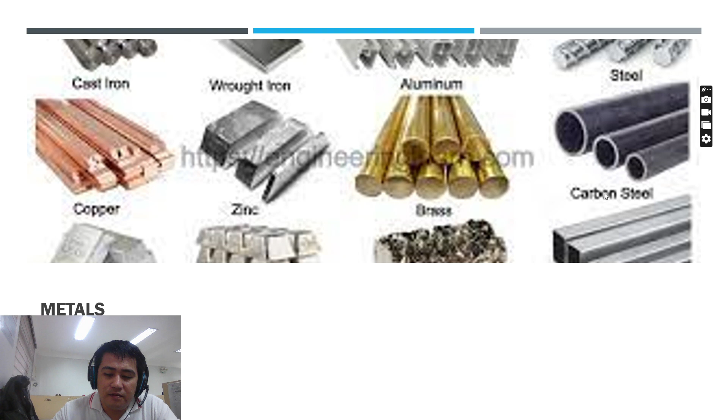Okay, so when we say metal, those are any of a class of substances characterized by high electrical and thermal conductivity. Since our topic is sheet metal, the main word is metal, so when we say metal, it is characterized by high electrical and thermal conductivity.

That means metals are good conductors of electricity due to characteristics like malleability, ductility, and high reflectivity of light. May nag-chat? Ano yung chat?

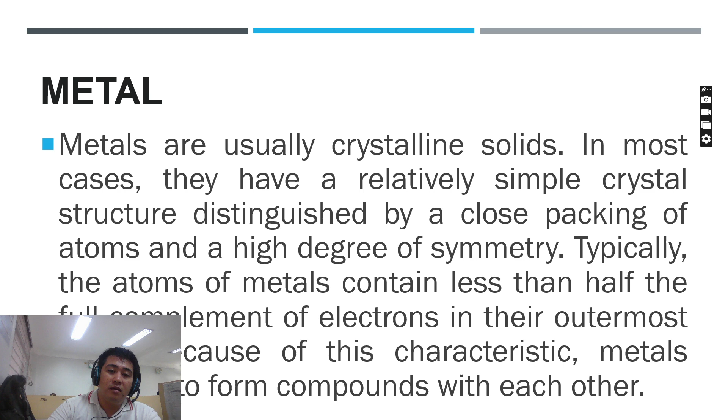Typically, the atoms of metals contain less than half the full complement of electrons in their outermost shell. Because of these characteristics, metals tend not to form compounds with each other.

Another characteristic of metal: they do, however, combine more readily with non-metals, which are oxygen and sulfur. That's why it rusts.

Non-metals generally have more than half the maximum number of valence electrons. Metals differ widely in their chemical reactivity. The most reactive include lithium, potassium, radium, whereas those of low reactivity are gold, silver, palladium, and platinum.

So some metals are reactive, while others are non-reactive. When we say reactive, whatever element gets mixed with it, it undergoes physical and chemical changes. Unlike low reactivity metals like gold, silver, palladium, they don't easily react with other elements, or if there's no reaction like gold, it doesn't rust.

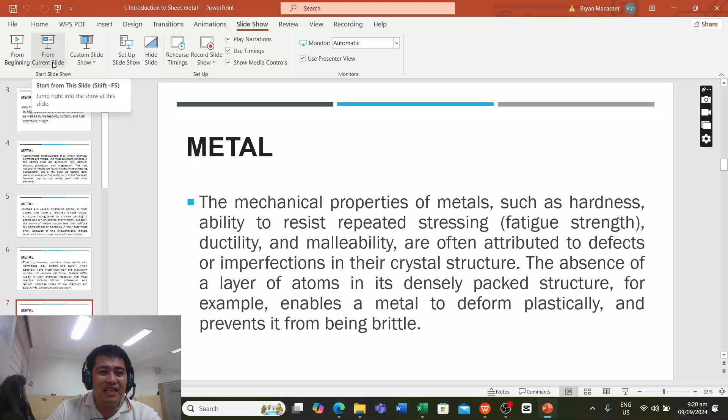Okay, the mechanical properties of metals such as hardness. When we say hardness, this is the stiffness, tension, the strength of materials. It is the ability to resist repeated stressing, which is called fatigue strength.

And then we also have what's called ductility and malleability, which are often attributed to defects and imperfections in their crystal structure. So when we say ductility, wait. What do we mean when we say ductility? Anyone?

Sir, parang dinadaloy yung kuryente.

Ductility refers to the ability of a material to sustain significant plastic deformation before fracture. Plastic deformation is the permanent distortion of material under applied stress, as opposed to elastic deformation, which is reversible upon removing stress. So ductility is a critical mechanical performance indicator, particularly in applications that require materials to bend, stretch, or deform without breaking. Meaning ang bakal ay may kakayahang madaling ma-bend, madaling ma-stretch, or ma-deform na hindi sisira. Yun ang ductility.

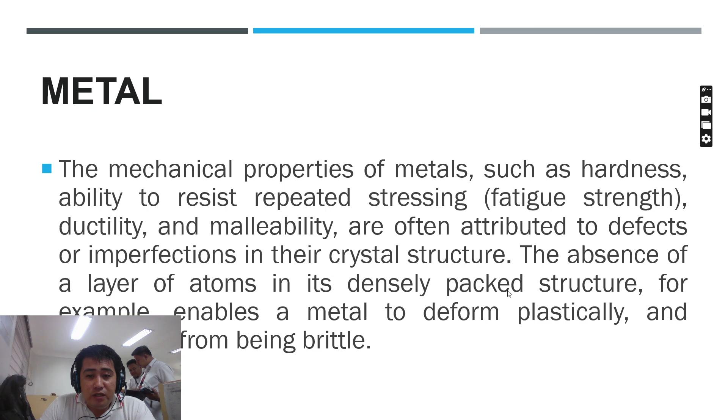May question ba with between ductility and malleability? Wala po. So that's why ductility and malleability often come in pair. Ductility is the ability of materials to be shaped without changing its attributes, without breaking. The absence of a layer of atoms in its densely packed structure, for example, enables a metal to deform plastically and prevents it from being brittle.

Okay, so that is about metal. Yes, sir. Next naman tinatawag nating sheet. Kasi kanina metal, ngayon sheet. Pag sinabing sheet, parang sa Tagalog piraso, tama ba? A sheet is a large, wide amount of something flat, like a sheet of metal or a sheet of paper. So when it goes on your bed, a sheet is a similar expanse of fabric.

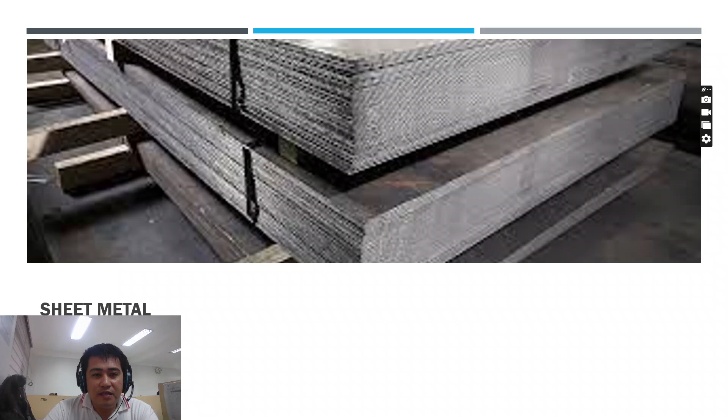As you can see in the picture, that is an example of sheet metal. So when we say sheet metal, it is metal formed into thin or flat pieces. So ito yung mga maninipis, kumbaga sa Tagalog, yung mga yero, lata, ganyan. Usually by industrial process, sheet metal is one of the fundamental forms used in metal working.

So the characteristics of sheet metal, syempre alam naman natin na manipis, at the same time lightweight. So kung manipis at magaan, syempre they are good in terms of production and industrial applications. Marami tayong industrial applications for sheet metal. Sino makakapagbigay ng halimbawa? Anyone? Kasi hindi ko kayo nakikita. Sheet metal is very good material in terms of industrial applications. Can you give examples kung saan ginagamit ang mga sheet metal?

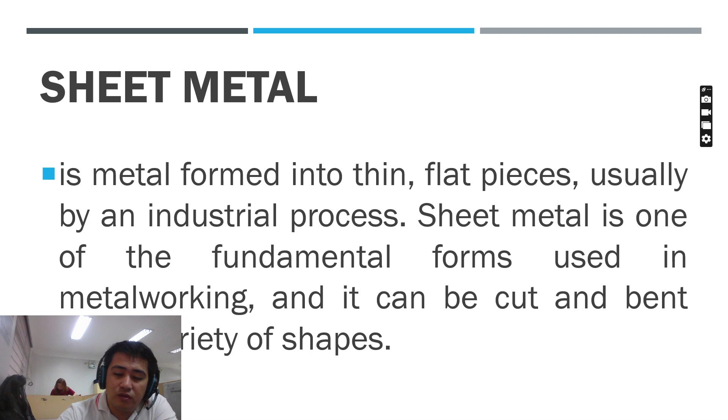Sheet metal is thin, flat pieces, usually formed by industrial process. It is one of the fundamental forms used in metal working, and it can be cut and bent into a variety of shapes. Due to its thin characteristic, it's easy to fold, bend, or shape into the necessary form. That's why bending operations, folding, and shearing are very useful for sheet metal, since it's thin and easy to reshape into the desired output. Examples include making a cabinet, a toolbox, a roof, the body of a vehicle, or the body of a tricycle.

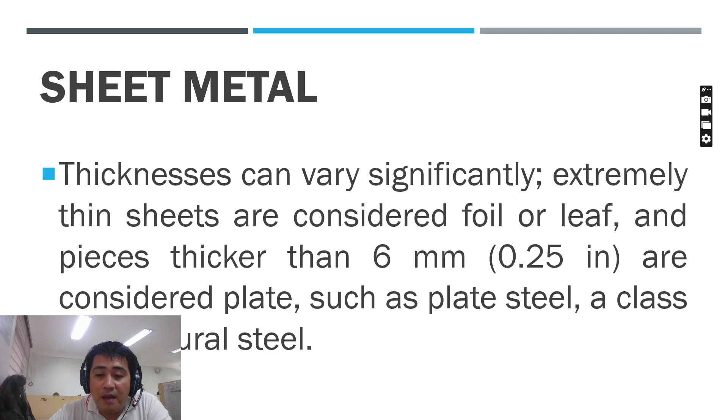Sheet metal is available in flat pieces or coiled strips. The coils are formed by running a continuous sheet of metal through a roll slitter.

In most of the world, sheet metal thickness is consistently specified in millimeters. In the US, the thickness of sheet metal is commonly specified by a traditional non-linear measure known as gauge. So in the British or metric system, mm is used for thickness, but in the US or US customary system, gauge is the unit used.

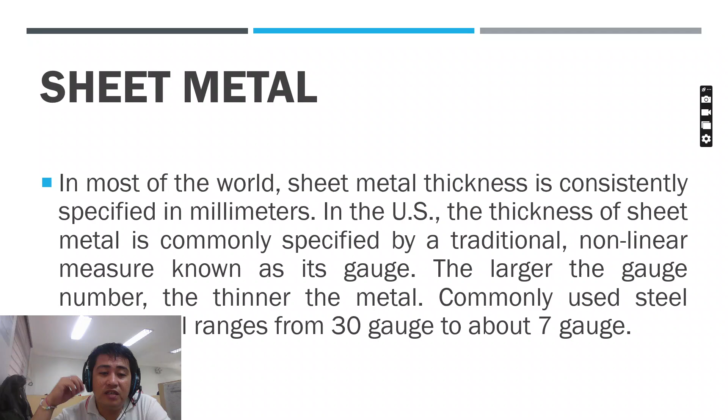So to be clear, the larger the gauge number, the thinner the metal, and vice versa - meaning the smaller the gauge number, the thicker the metal. Commonly used steel sheet metal ranges from 30 gauge to about 7 gauge.

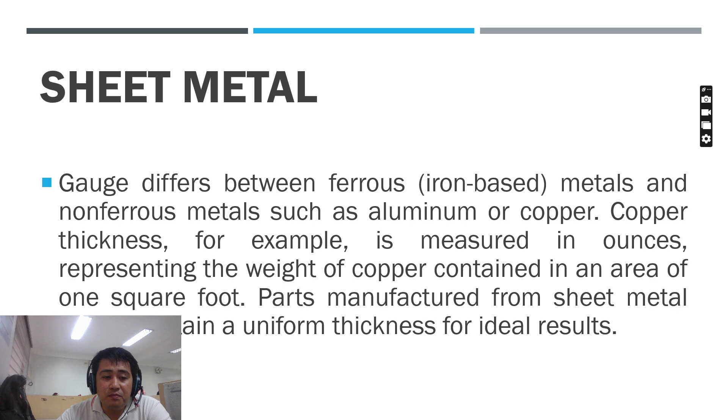As mentioned earlier, the unit used in the US is gauge. Gauge differs between ferrous metals and non-ferrous metals such as aluminum or copper. Copper thickness, for example, is measured in ounces, representing the weight of copper contained in an area of one square foot. For parts manufactured from sheet metal, we must maintain a uniform thickness for ideal results.

There are many different materials that can be made into sheet metal - we have aluminum, brass, copper, steel, tin, nickel, and titanium. For decorative uses, some important sheet metals include silver, gold, and platinum.

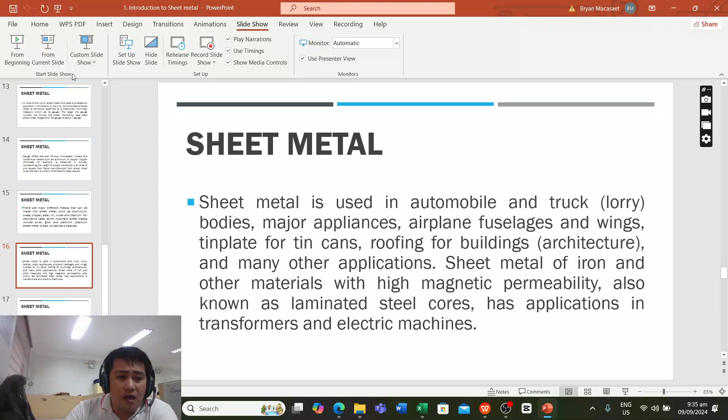Since sheet metal is very useful, it is used in automobiles and trucks - for the body, the roof, and other parts. It's also used in major appliances, airplane fuselages and wings, tin plate for tin cans, roofing for buildings, and many other applications.

That's what you mentioned earlier, for construction. Sheet metal of iron and other materials with high magnetic permeability, also known as laminated steel cores, has applications in transformers and electric machines.

Historically, sheet metal was used during times of war. The first application of sheet metal was in plate armor worn by cavalry - the armor, the shield used against swords. Sheet metal continues to have many decorative uses, including in horse tack.

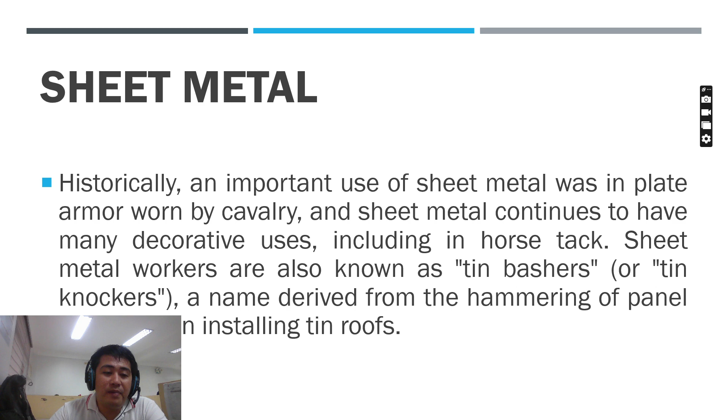Historically, hand-hammered metal sheets have been used since ancient times for architectural purposes. Water-powered rolling mills replaced the manual process in the late 17th century. The process of flattening sheet metal required large rotating iron cylinders which press metal pieces into sheets. The metals suited for this were lead, copper, zinc, iron, and later steel.

Tin was often used to coat iron and steel sheets to prevent rusting - this is commonly applied to galvanized sheets so they don't rust. This tin-coated sheet metal was called tin plate.

Sheet metals appeared in the US in the 1870s, being used for shingle roofing, ornamental ceilings, and exterior facades - as mentioned earlier, in architecture, construction, and interior design. Sheet metal ceilings were popularly known as tin ceilings, although manufacturers of the period did not use that term.

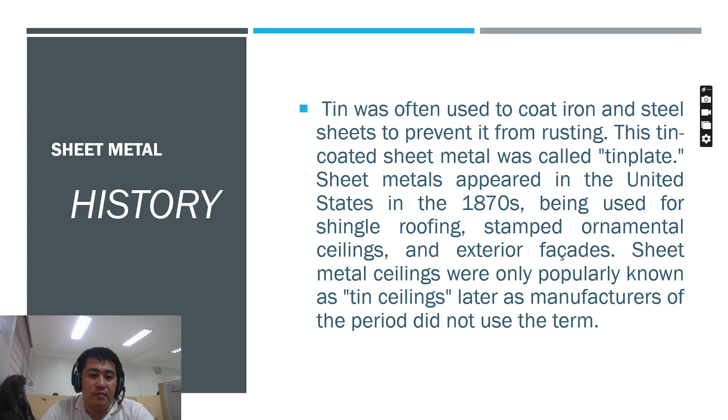The popularity of both shingles and ceilings encouraged widespread production. With further advances in steel sheet metal production in the 1890s, the promise of being cheap, durable, easy to install, lightweight, and fireproof gave the middle class a significant appetite for sheet metal products, especially canned goods - imagine if canned goods weren't made of sheet metal, how heavy they'd be.

This is the last slide for the first part. It was not until the 1930s and World War II that metals became scarce and the sheet metal industry began to collapse, since during the war industries focused on the war effort. However, some American companies such as W.F. Norman Corporation were able to stay in business by making other products until historic preservation projects aided the revival of ornamental sheet metal.

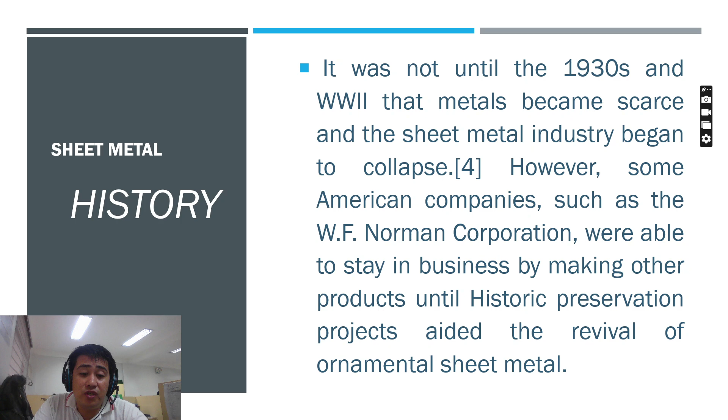Sheet metal evolves through the years - there are so many uses for sheet metal. Almost everywhere you look, there's a metal product, usually with sheet metal components. That ends our first part, the introduction to sheet metal. Do you have questions? None. Okay, we will proceed with the next topic.

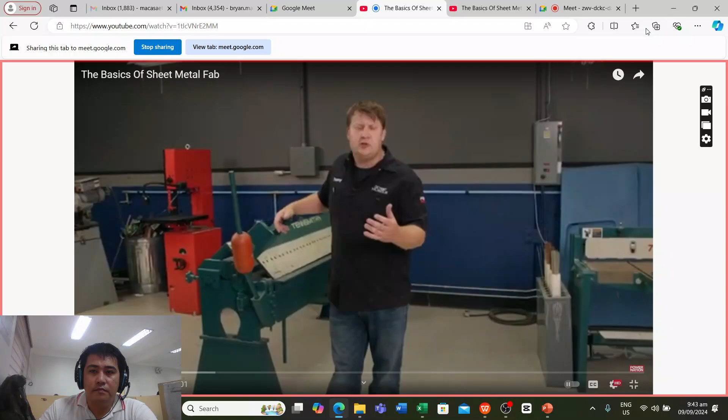Hey y'all, we had some viewers contact us looking for some information on basic sheet metal fab. So we're going to slow down a bit and do a little how-to. Now, if you're going to be doing any sheet metal fab to amount to anything, there's two items you're going to want to have in the shop: a sheet metal brake and a stomp shear. They make these things a whole bunch of different sizes with a whole bunch of different options. We're not going to get into all of that, but let's go ahead and get started.

Well, I grabbed us some metal out of the scrap bin so that we can do this.

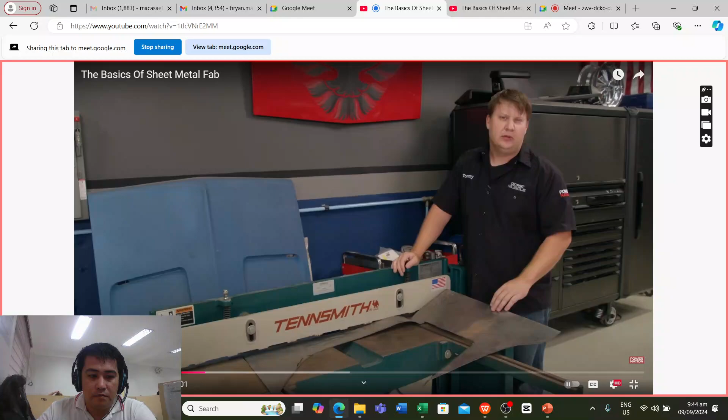Okay, so as you can see on the video presentation, am I audible?

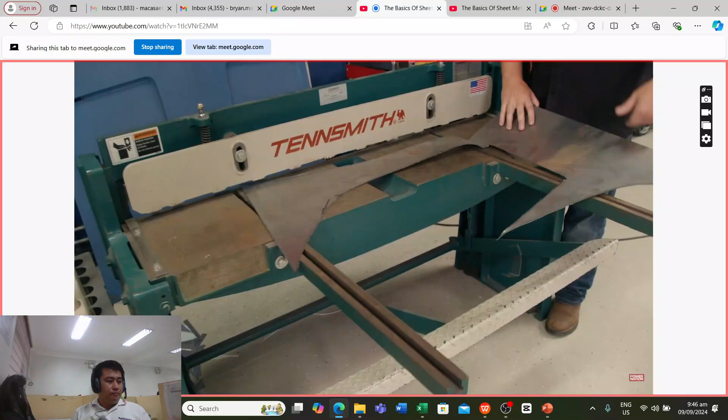Demonstration. Now, oftentimes, whenever you're going to do some sheet metal work, you've got your go-to tools: tin snips, stomp shear, and say a plasma cutter. Now all these tools have their benefits, but they have their drawbacks as well. With a plasma cutter, depending on your skill set, it's hard to get a nice straight cut, and also the plasma torch leaves slag.

Now, with a stomp shear, it gives you...

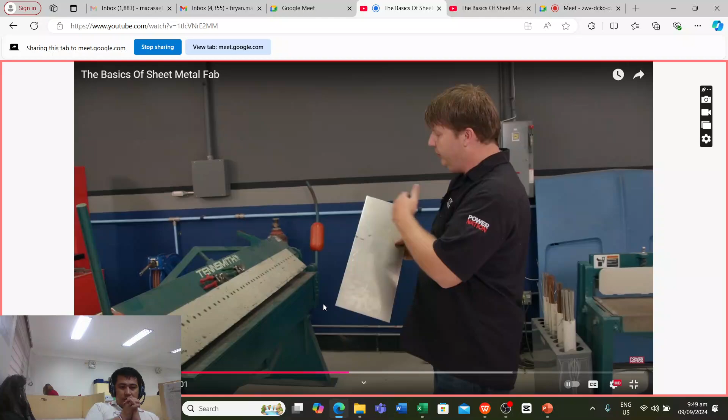Be making is a simple box. I've got to draw a few lines on here and then trim off the corners. It's that simple.

Now we're going to put this here in the jaws so that I can cut them corners off.

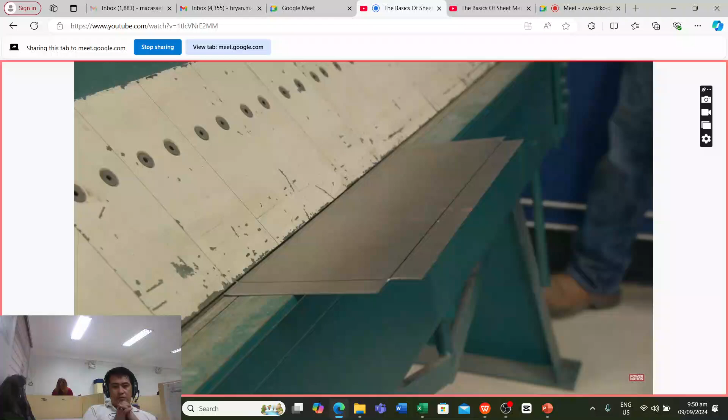With all the corners cut, now we can get to bending. That's real simple. We're just going to lay this line up in here in this corner, bend it around.

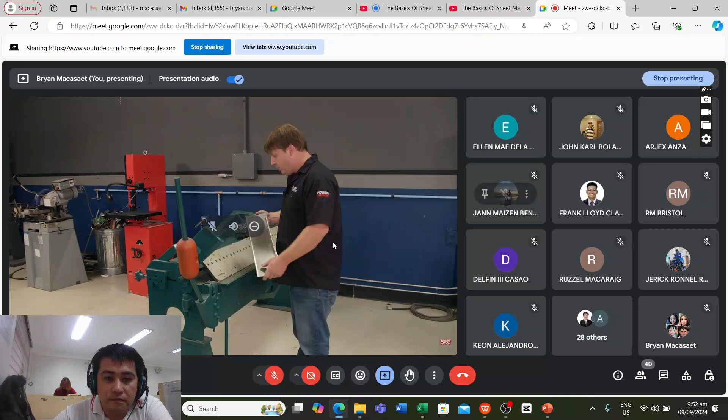All right, now we're ready to bend up these little short flaps, and we can't just stick it here in the brake, because if we did, about all we can get is about 45 degrees. So we're going to have to remove some of these teeth to get us where we need to go. Now we need to find a couple of teeth that are close to the same width as our metal.

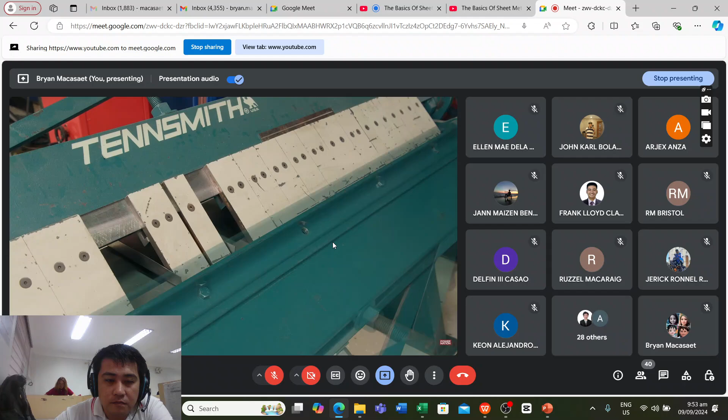Hope you like it, and all it took was a few tools to make it.

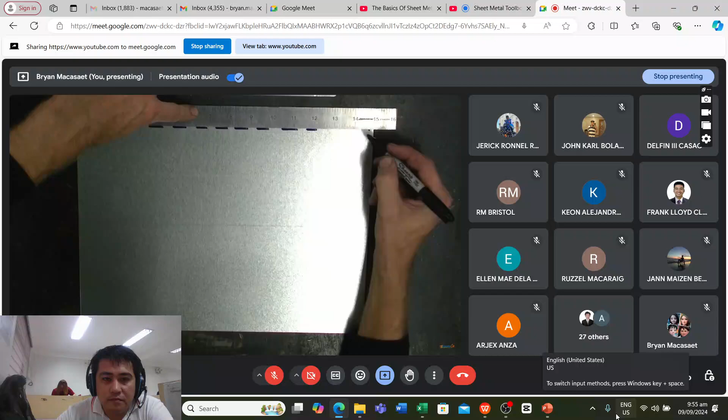To begin, we have a piece of metal that measures 1 foot 2.5 inches by 10 3/4 inches. I'm going to start out by laying out my number 1 operational line by creating some reference points that are a 1/2 inch away from the edge of my object. This will be a dashed line that runs almost the entire way across our sheet metal. Next, I'm going to lay out my number 2 operational line. Again, that is a 1/2 inch from the edge of our sheet metal. These will also run almost the entire way across ours.

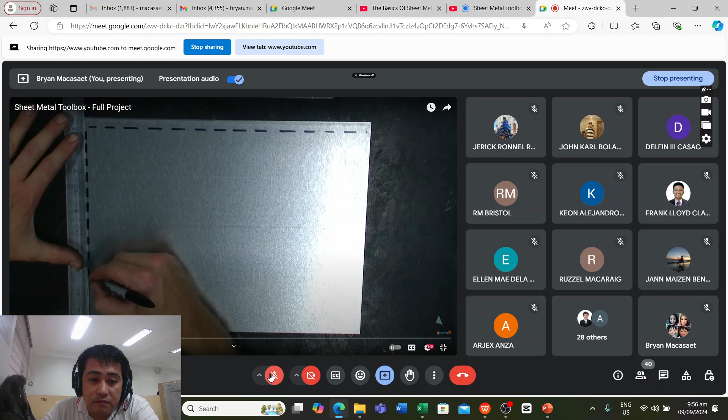Our workpiece. Next, I'm going to identify the corners, which will be cut out. It will be a 1/2 inch by a 1/2 inch. This will be an object line.

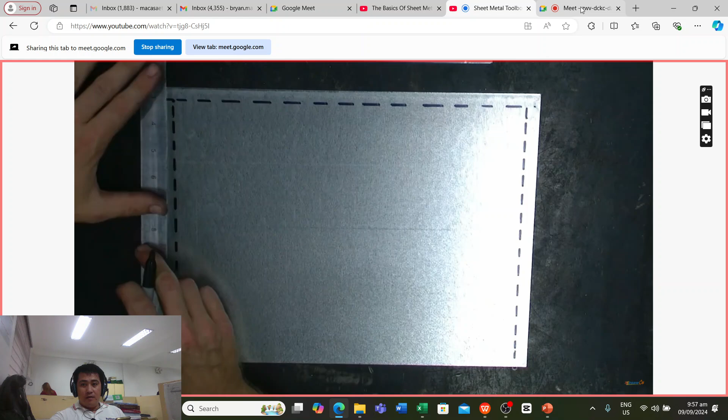After that, I'm going to identify my number 3 operational line, which is 2 5/8 inches from the bottom of my object. This will be a dashed line. I'm then going to measure up 7 5/8 inches, which will give me my number 4 operational line, and I get this by adding the distance from the edge of my object to my number 3 line plus the distance between my number 3 line and number 4 line.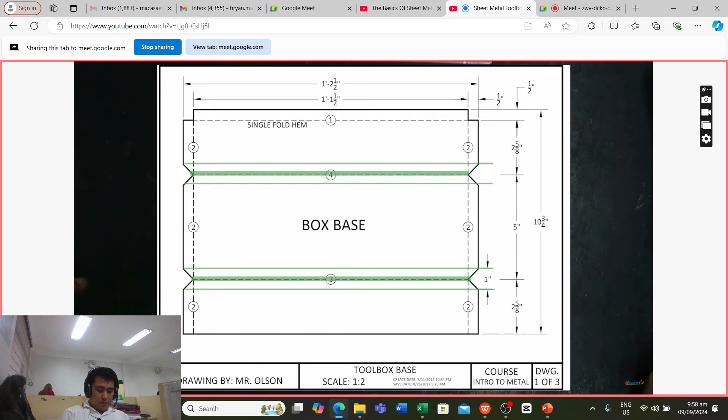After that, we need to lay out our notches, which are located a 1/2 inch on either side of our number 3 and number 4 operational line.

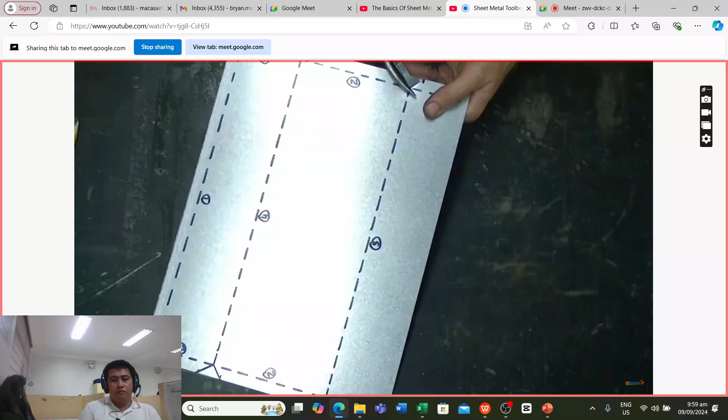After my lines have been laid out, I'm going to identify my sequence of operation lines. After having laid out the toolbox base, I'm going to be using aviation shears and cutting out each of the 6 notch locations.

Taking a look at the operational procedures, our first fold will be a single hem. This will be on our number 1 identified line. Using the box and pan brake, we will be placing the number 1 operational line in line with the edge of the finger blocks.

When completed, you should have a single hem. Next, we will be doing our number 2 operational line. This will be bent to a 90-degree angle.

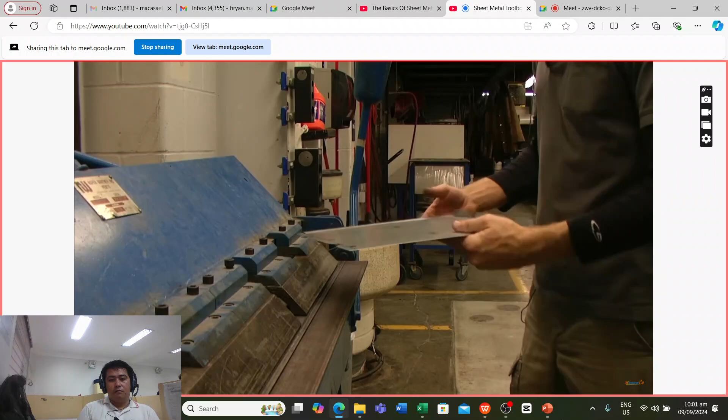And we will do the same procedure for the other end.

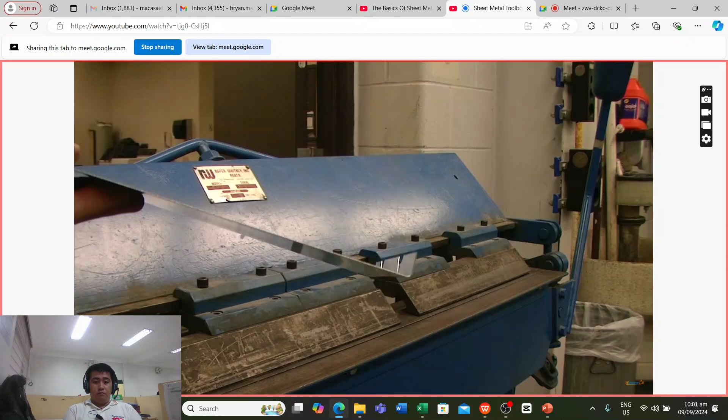After that, we're going to do our number 3 procedural line. And again, we're going to line up our line with the edges of our finger blocks. And this will go at 90 degrees also.

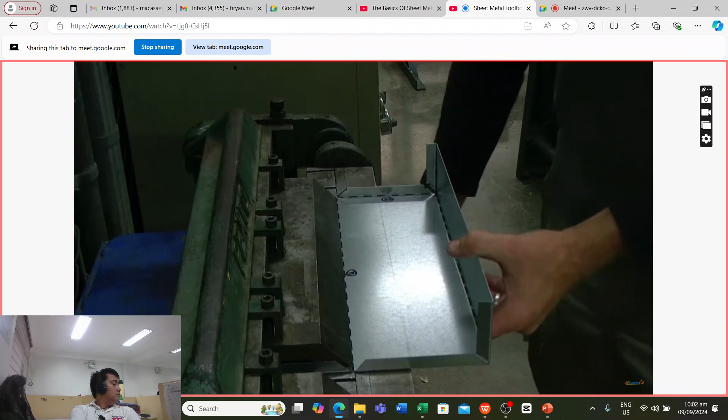And then that will be followed by our number 4 procedural line. This one will also be bent at 90 degrees. At this point, the base of our toolbox has been made.

You want to start by double checking that your sheet metal is 5 inches wide by 4 inches tall. This is the size of each of our 2 ends. I'm going to begin by laying out my first reference point, which is 1 5/8 inches from each edge of our part.

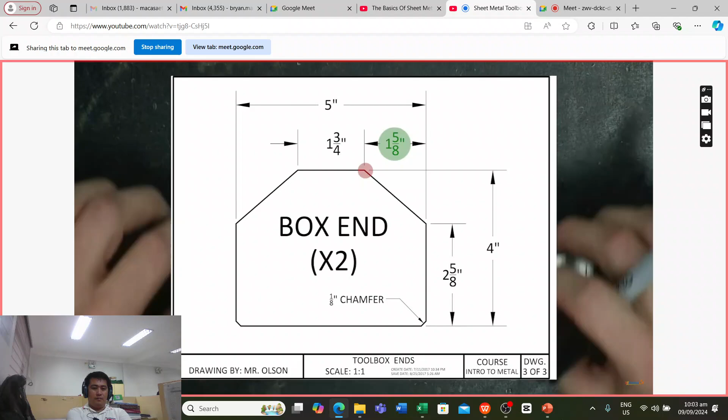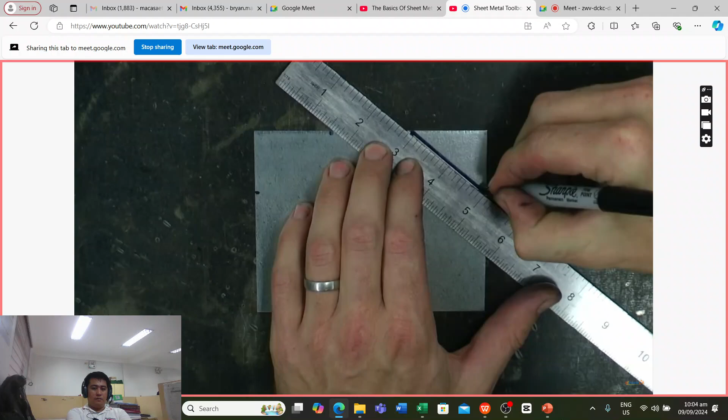I'm then going to lay out 2 5/8 inches from the bottom as another reference point, and connect those together. My 1/8 inch chamfer will be laid out next.

After laying out our toolbox ends, we will be using the squaring shear to cut each of the corners to our identified marks. It is important to line up our marks very carefully and very accurately.

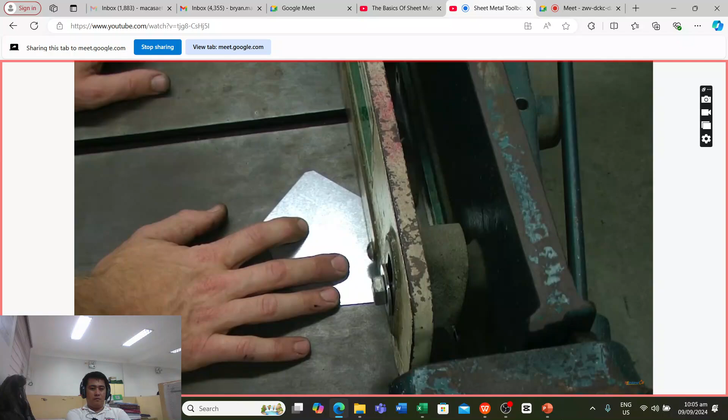After our corners have been cut, we want to fit our ends into the base to see if we need further adjustments.

If we take a close look at our end with it being installed, we can see that the left side is tight up against the left side of our toolbox. However, the right side, we are touching at the bottom, but we have pushed out the side of our toolbox at the top.

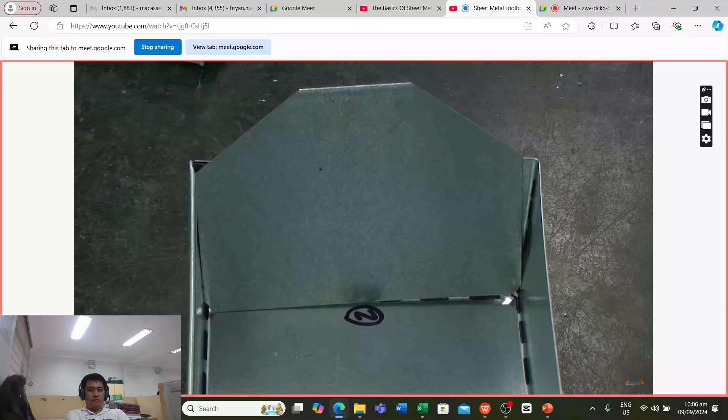This is an indication that our side pieces are slightly too wide to fit in here comfortably, so it is forcing that right side of our toolbox further away. We need to correct this issue before we continue.

To correct this, I'm going to be creating a mark about a 1/16 of an inch on the edge of my side. I'm then going to use the squaring shear and shear off that 1/16 of an inch of material.

And I'm again going to test fit that. This time it slid easily in place and did not push out the sides of my toolbox. And lastly, we're going to use a metal file to take off any burrs on the edge of the metal after sizing our toolbox.

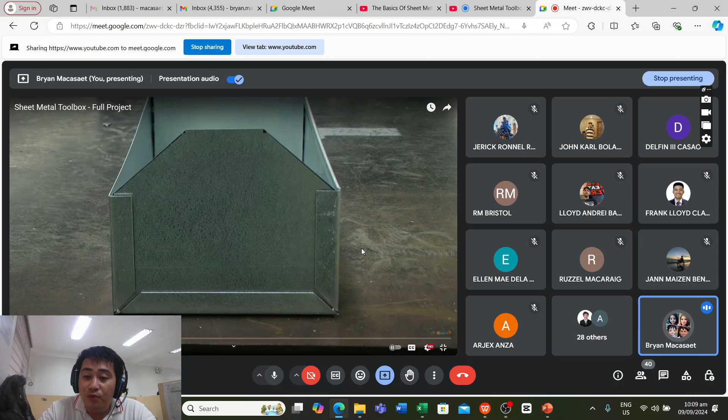Box ends so they fit comfortably within our toolbox base. We will be spot welding the toolbox ends in place.

We're going to use a series of spot welds, 2 along the shorter sides and 3 along the longer side at the base.

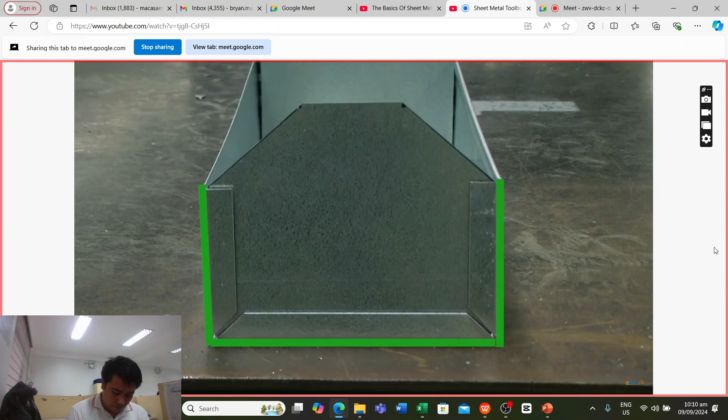However, prior to spot welding, we need to double check a couple things. First off, we need to make sure that when the end is installed, the sides of our toolbox are perpendicular to the base. We want a 90-degree angle in each corner. If this is not the case with your toolbox, you will need to adjust either the sides or the ends.

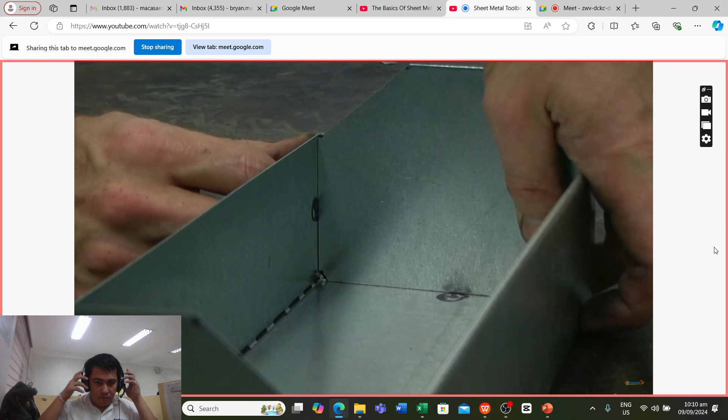Additionally, if your sides are bowing out, do not spot weld it. We need to make sure that the toolbox ends are tight with the sides of the base. Towards the back of my toolbox, the side is not all the way tight up against the end. Prior to spot welding, I need to make sure that this is held in place tight against the end piece, otherwise it will throw my measurement off for the opening of my toolbox.

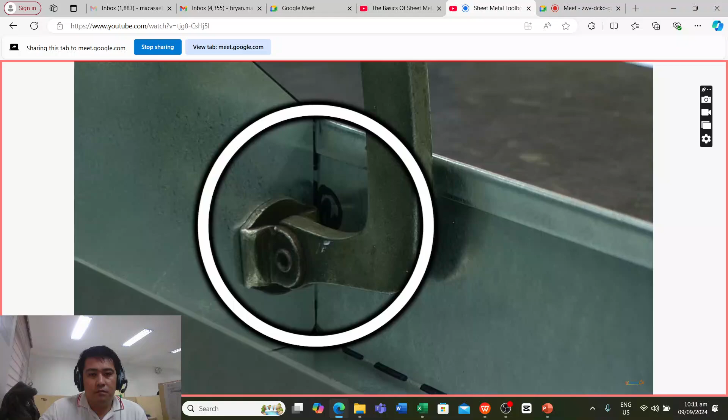Prior to spot welding, I'm going to install a clamp to help hold my sheet metal in place so it won't move on me. Again, I'm double checking to make sure that the toolbox end is tight up against the side of my toolbox base. Using the spot welder, we want to make sure that the spot welder will not come in contact with the clamp, but it will be positioned correctly to give us a good spot weld.

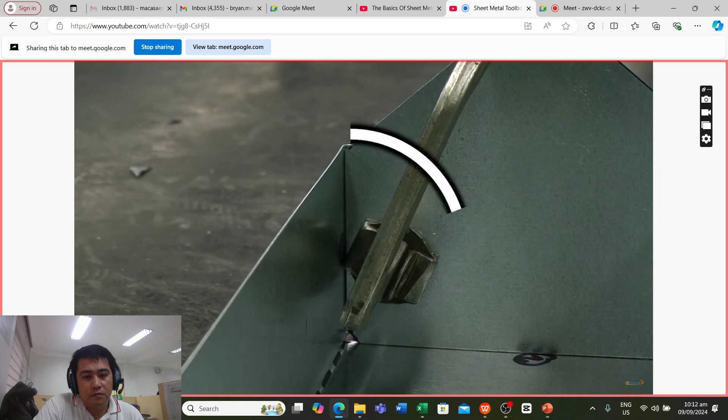On my second side, I can see that the toolbox end is tight up against the toolbox side. I'm ready to spot weld.

So far, I have only done two spot welds, one on each of the sides, double checking in between spot welds to make sure that everything is lined up correctly. At this point, I should not need the clamp anymore, and I should be able to hold it in place and do the remaining spot welds.

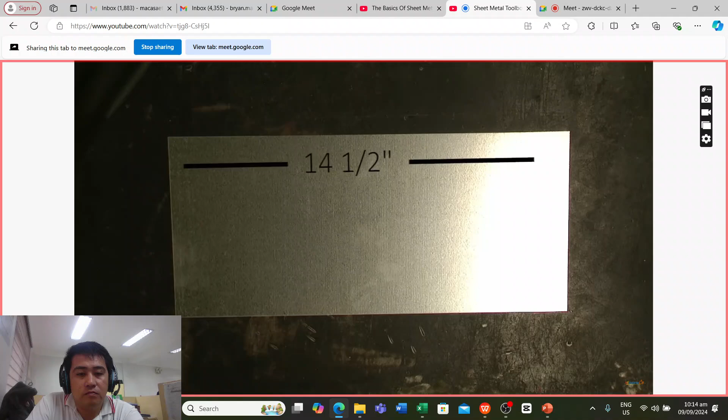You want to verify that you are beginning with a piece of metal that is 14.5 inches wide by 6.5 inches tall. I'm going to start by laying out my number 1 operational line, which is located a half inch away from the edge of my object. This will be a dashed line and will run on.

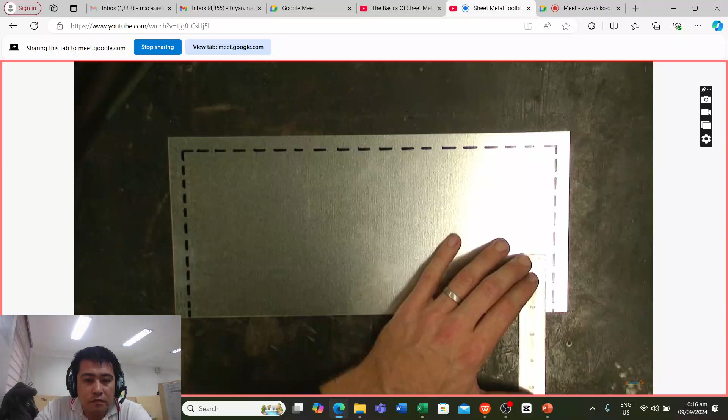Taking a look at my number 2 operational line located furthest towards the bottom of my drawing, I'm going to identify that line, which is 2.125 inches from the bottom. My other number 2 operational line is 3.875 inches from the bottom.

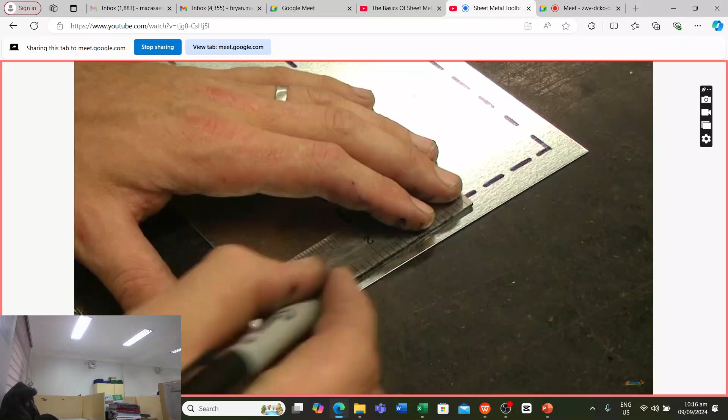Next, we need to identify 3/16 of an inch on either side of my number 2 operational lines. And then our last point of reference is 1 1/8 inches from the top of our part. This is adding together a half inch for our upper tab and 0.625 inches as our referenced measurement.

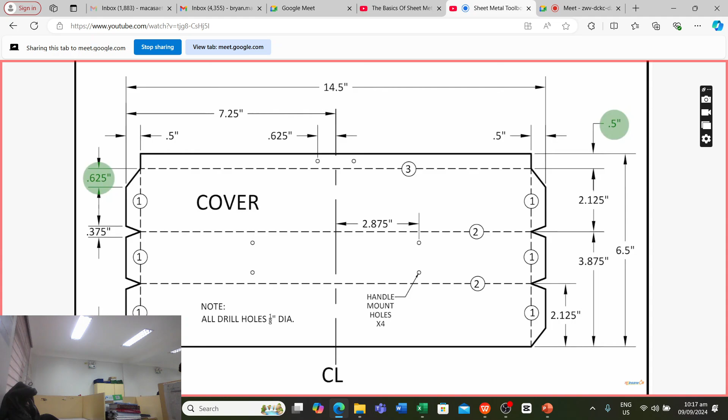Next, we need to locate our handle mount holes. To do that, I am going to create a center reference line, and base my measurement off of that center reference line. It will be 2.875 inches on either side.

I then need to create a horizontal center reference line, and from here I can go a half inch on either side of that center reference line.

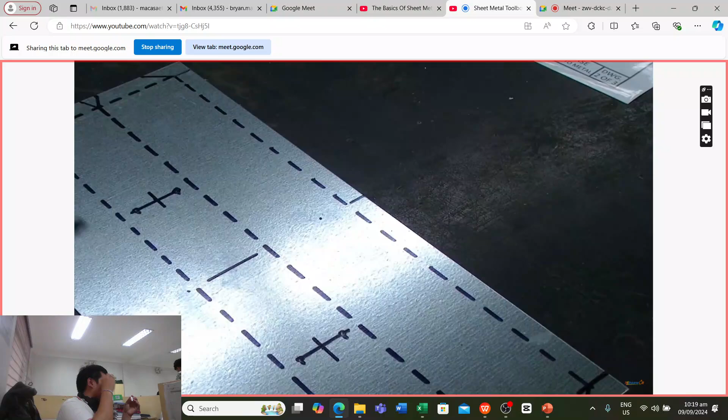After that, we have our latch holes. So I'm going to extend that center reference line up and base my 0.625 measurement off of that center reference line.

After our ends have been installed, we are going to create the top so that it is contoured to those ends. We're going to start by cutting out all of our notched portions with aviation snips.

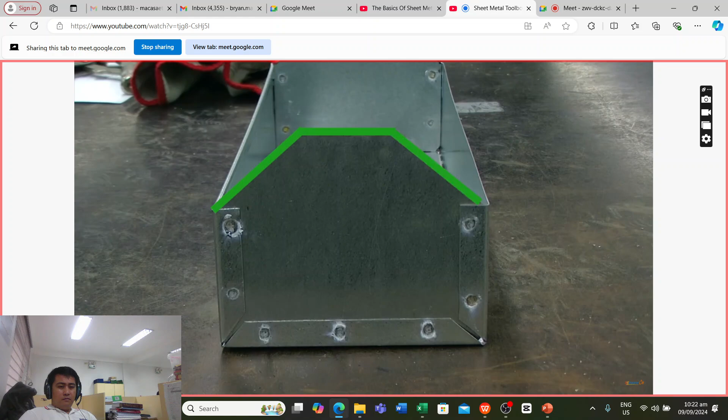Next, we will be bending our first number 2 operational line. This will be bent a slight amount. It will be under 90 degrees because we are trying to contour this to the end of our toolbox. A good indication to tell you if you are getting close to the proper angle is to take a look at the little V notch that you cut out. When each leg of the V come together, that is a close measurement for what we need this to be at.

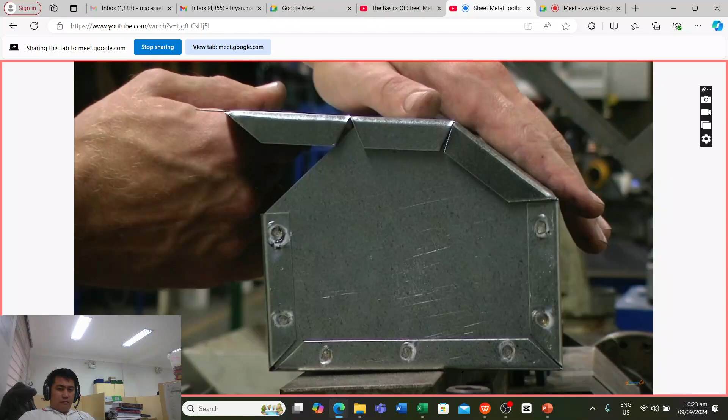We're then going to set the cover on our toolbox and see if we're getting close to that desired angle. With this edge tight against the end, I'm still going uphill just a little bit, so I'm going to try to bend that a tad bit more, and then I'll move on to the next one. We will be able to adjust this a little bit by hand once it is folded up.

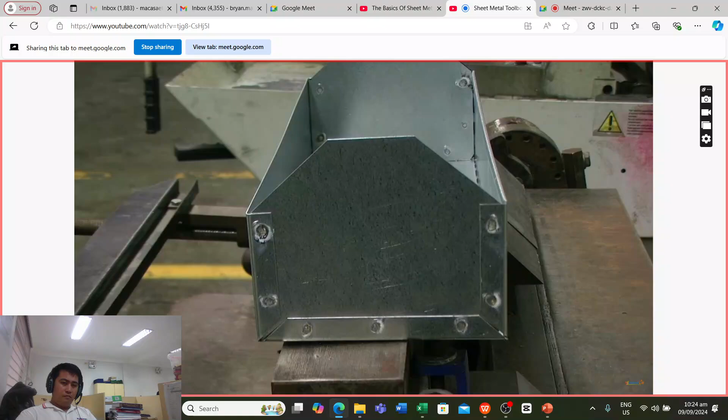After that, I'm going to flip the top around, insert it back into the box and pan brake on my other number 2 line, and fold this up at that same angle. And once again, we can double check our contour.

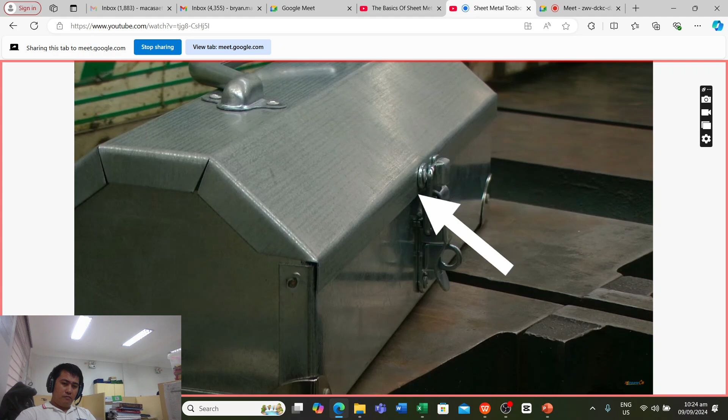Now there should be a small gap along the back edge of your project, and there should be a small lip along the front edge of your project. The gap along the back edge will accommodate the hinge that we will install at a later time, and the small overhang on the front edge of your project will be folded down somewhat to accommodate the latch mechanism. This will also help seal your toolbox shut.

The next step is to bend the overhang on the front, and that is our last procedural order of operation line. This needs to come down so it is perpendicular to the base of the toolbox. It should be parallel to the sides of the toolbox. It will not be at a 90-degree angle to our top, but it will be a 90-degree angle to our cut mark. So we will line up that third and final operation line.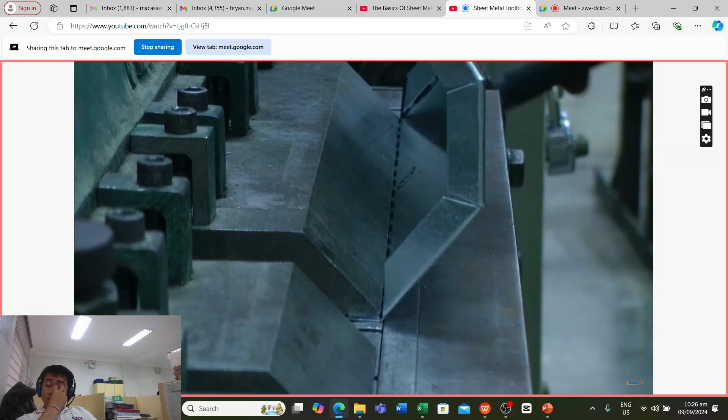And bend that into position. And another quick test. I think we're looking pretty good.

Our toolbox will have a hinge running the entire length for connecting the cover to the base and allowing us to open and close it. The hinge consists of 2 pieces of metal with fingers and a pin running through the fingers. If we take a look at the back of the hinge, you can see what almost appears to be a line going down the length of the hinge at the base of each of the fingers. Each of these lines will be our reference lines for installing the hinge on our project.

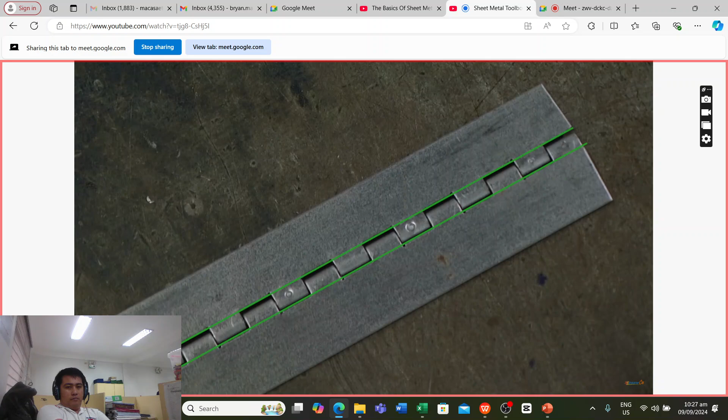It is very important to recognize and identify these reference lines prior to installing it on your project. The distance between these lines will be the reveal of our hinge on the back portion of our project. The hinge will be installed along the back edge of our project. This is the edge opposite of that single hem that we put on the base. The single hem side is the front of our project. We want to focus on the back edge.

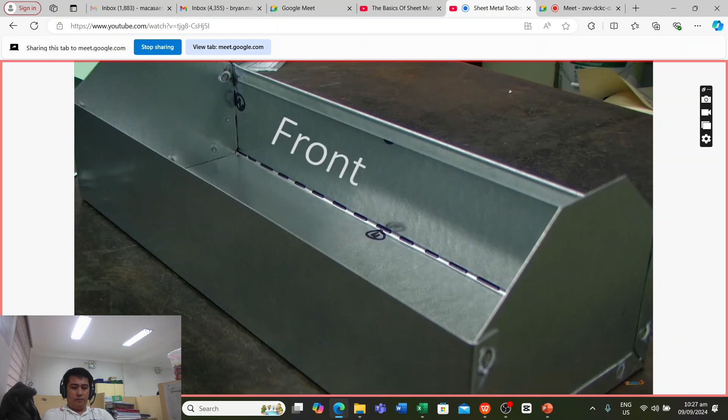The hinge will also be going on the inside of our project, not the outside. To lay out the hinge, I'm going to be basing my hinge location off of that reference line at the base of the fingers of each of those pieces of the hinge. If your hinge is sticking too far forward, you're going to run into problems with your toolbox not closing properly. If you put the hinge too far back, your toolbox isn't going to be able to open or close because it cannot pivot on that hinge pin.

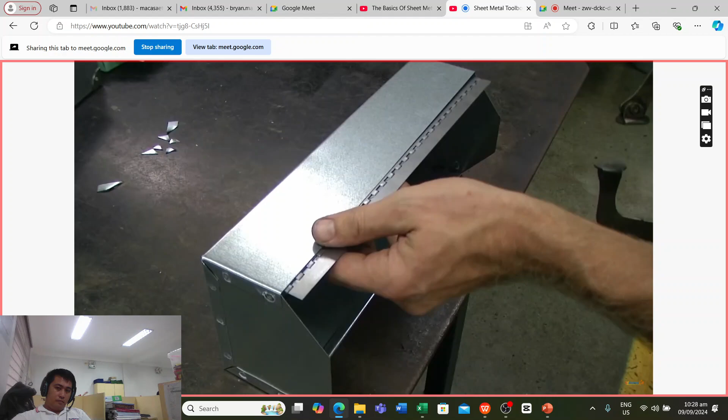With the hinge positioned correctly, I'm going to be placing 2 clamps along the length of the hinge to help hold it in place.